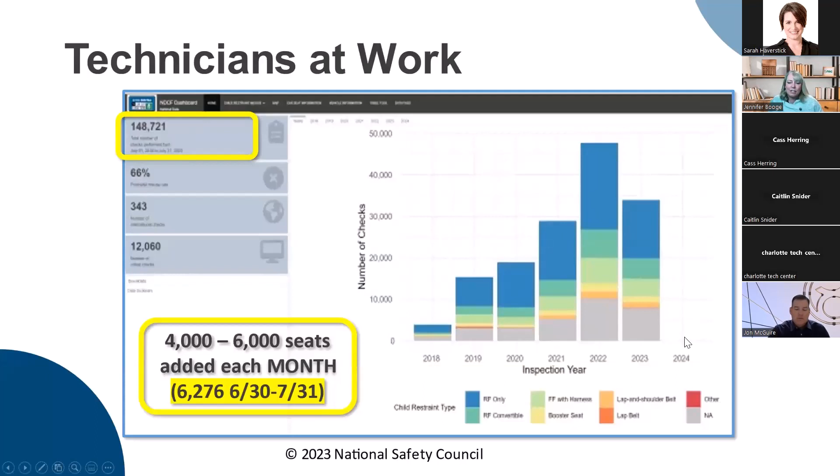We average somewhere between 4,000 and 6,000 seat checks per month. And of course, we're leading up to National Child Passenger Safety Week, Child Passenger Safety Month here in the US. I'm anxious to see what our numbers will look like in September, but just to give you some perspective, from June 30th to July 31st, we had 6,276 seat checks entered in. So that number continues to grow. That just means that technicians are doing amazing work out in the field and working one-on-one with caregivers.

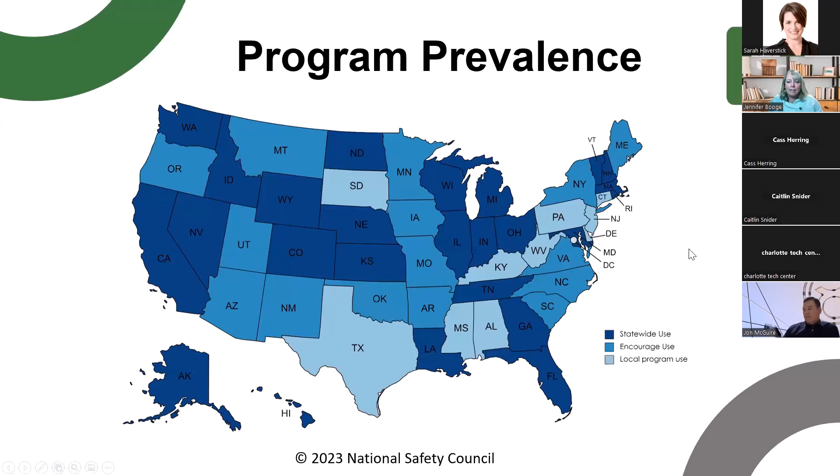And the light blue colors, we have a lot of local level programs that have adopted the use of the NDCF. The digital check form has been around for about 6 years now. It's been really growing organically, and so it's great to be able to see the work that technicians are doing and the data that's being fed into the NDCF. So I wanted to just go over some of our data analysis that we were able to do with those seat checks, the data collected up through June 30th, 2023. So we're utilizing those 142,000 seat checks.

What we're finding through the NDCF data is that about 60% of the checks are those rear-facing seats. What that means is that technicians are doing a really great job at reaching out to those expectant parents, to those caregivers with newborns. They're coming in for assistance with their car seats, but we are kind of missing the mark a little bit, as you'll see in the data, for those older children. We seem to see fewer older children coming through our inspections. Of those 60% of those rear-facing seats, 57% were infants or unborn children. We have an overall misuse rate in that category of about 62.6%.

So when we look at just a breakdown of the types of seats on arrival, again, you'll see about 60% of those are those rear-facing car seats. We see a significant decrease in the number of children coming to check events in forward-facing car seats, with only 12% of those children riding in forward-facing seats coming to car seat inspections. So what does that mean for us as providers, working with caregivers, as retailers reaching out to caregivers and providing them with the education? We need to encourage those caregivers to come back. They're coming initially, but what can we do to draw those caregivers to come back to receive additional assistance when they transition those children to forward-facing seats?

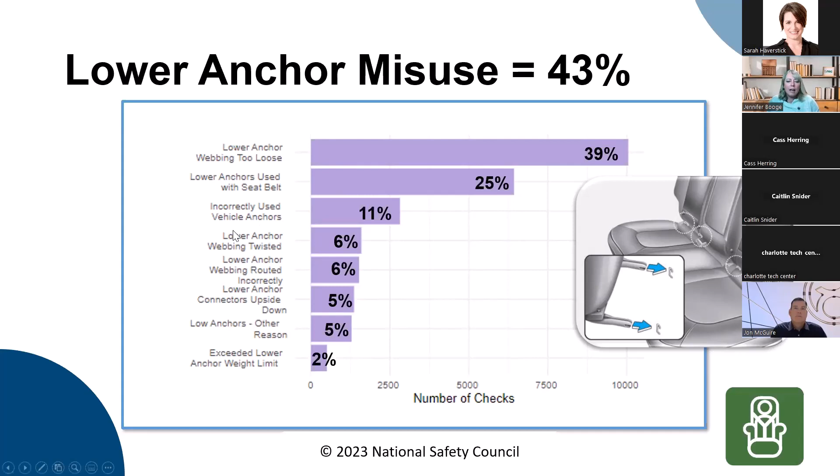If we did a comparison between our seatbelt installations and our lower anchor installations, you'll see here that caregivers are doing a much better job with our lower anchors. Our misuse rate is still at about 43%, but they're doing a significantly better job at installing them with the lower anchors than they are with the seatbelts. Again, at the top of the list is that it's too loose. So our message, as you can see, we're kind of seeing a pattern here, is to encourage caregivers and show them how to install those car seats to get them in nice and snug in their vehicles. And again, second on the list is using it in conjunction with the seat belts.

When we look at our tether misuse, it is at 54%. Now, what's alarming to me is the number of caregivers that aren't using a top tether. Our tether not used comes in at 68%. So of those car seats that have a top tether, so forward facing seats, 68% of those caregivers are not using the top tether. So we want to be thinking about what our message is going to be and what kind of outreach strategies and education we're going to use as we're working with consumers and caregivers out in the field. We want to encourage those caregivers to use that tether.

When we look at our harness misuse rate, and again, this is overall, the misuse rate is about 49%. And breaking down those top misuses, again, coming in at number one, is that the harness is too loose at 34%. Followed closely by harness slot in the wrong placement. So it's either too high or too low. And then the chest clip is either too high or too low. So again, we have a lot of work to do to educate caregivers on the proper use of those harnesses and making sure that they're in the right slot.

We're seeing an increase with a number of seats that have those no rethread harnesses where we can just simply raise and lower, but caregivers are oftentimes not understanding the functionality of those, that ability to be able to raise and lower that harness.

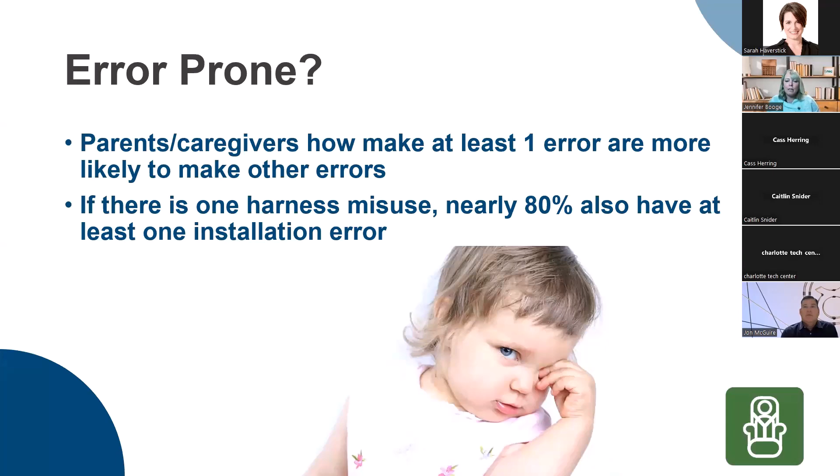So not only do we need to educate the caregiver on choosing the proper car seat, but on using it correctly, making sure that that child is secured correctly and that car seat is installed correctly in the vehicle.

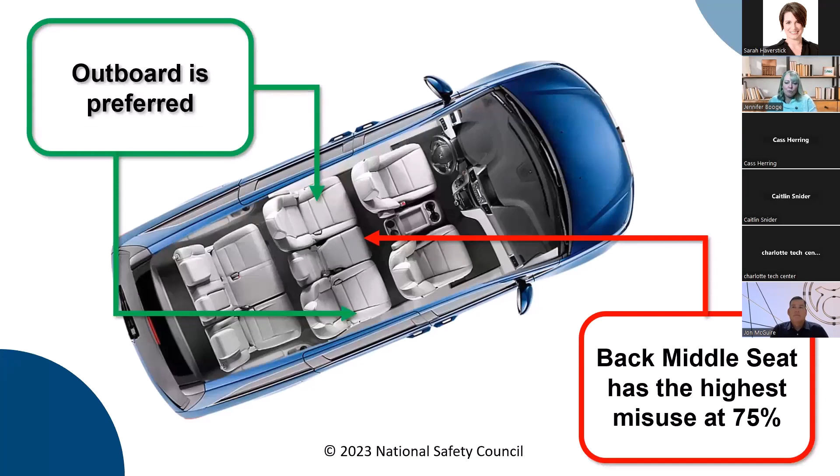So the next thing that we looked at was what was the preferred seating positions for children riding in car seats. And the preferred seating positions are those outboard seating positions. We have a 75% misuse rate in that middle back seat of a vehicle. And so caregivers are using outboards because of the lower anchors, but of those children that were riding in the center, we had a 75% misuse rate in that center seating position.

So that was just a quick summary of some of the data that we've collected through the NDCF.

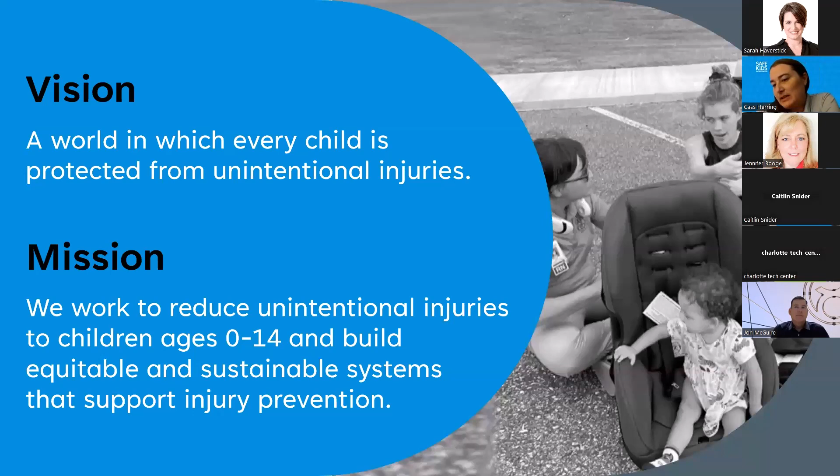So here's a great place that you can kind of go and look through the different resources that we have available. We even have them by age group. So if you're looking specifically at booster seats, we have a tab there for that. Or if you're looking for general safety tips, those are there as well. And there are downloadable versions if you'd like to share those with the parents and caregivers that you're working with.

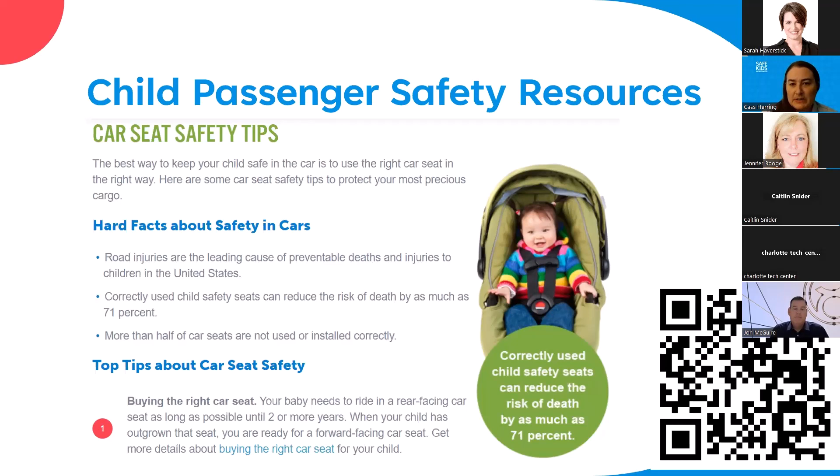And the next thing that I wanted to share with you is the Ultimate Car Seat Guide. This is available in English and Spanish, so you can change the page actually to Spanish. That has a few basic safety tips for parents and caregivers, and they can kind of select a general age range that would provide them a best practice recommendation for the car seat their child should be in and how to use it.

But looking at how we break that down into what that means to us, there are about 14 fatal injuries per week. And that's a big statistic. And some of those, as we'll see in our next slide, are unrestrained. So we can make a big difference just by making sure that kiddos are in a restraint or proper restraint for their needs.

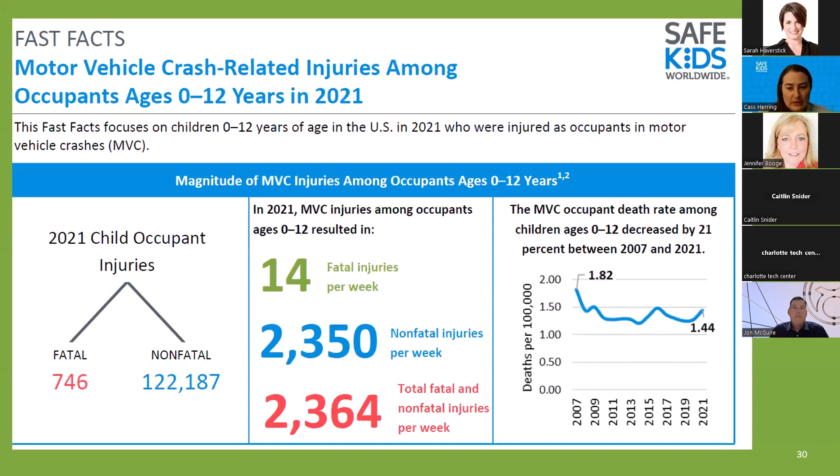So you see the fatal injury rate was slightly higher in that 4 to 7 age range, and looking at 0 to 3, kind of up towards the 3-year-old age range too. And that's something that Jennifer talked about in transitioning too early or not being in the proper seat. In the data that she showed, you can see that reflected in the injuries and what's actually happening in the field.

This data also breaks down the injury rate among different demographics and looking at the highest risk, we have a higher risk of fatal injuries for Native American and Alaskan natives in this age group. So it tells us that we need to make an effort in making sure that we're partnering with these communities and providing education that's relevant to what their understanding is and making it salient for the populations that we're serving.

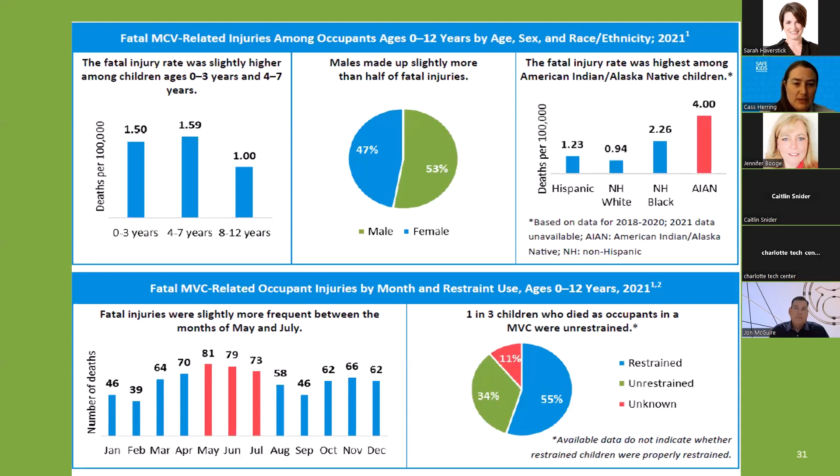And this is a great graphic, and you can actually download this fast fact from our website. You can access it from the same safety tips page that was previous. You can use that QR code. And Sarah, I'm happy for you to share these slides if you want to do that. But this kind of quantifies injury in a dollar amount, and it's kind of staggering. So utilizing CDC data and calculating this, you see that these injuries that are preventable can cost families and our society quite a bit.

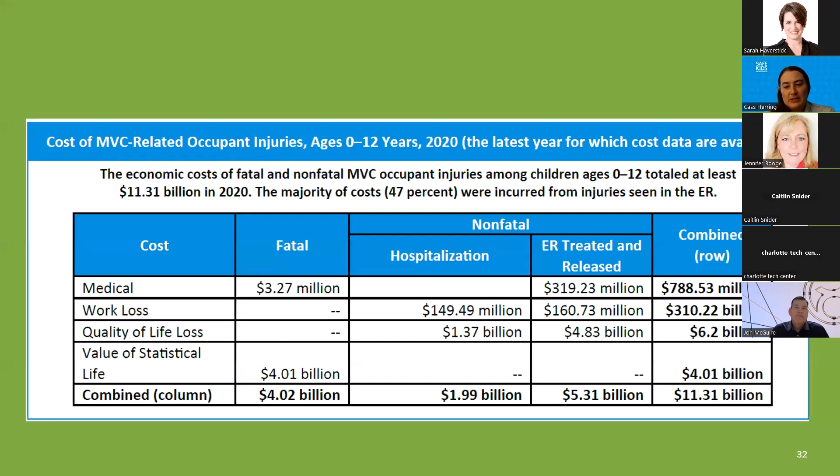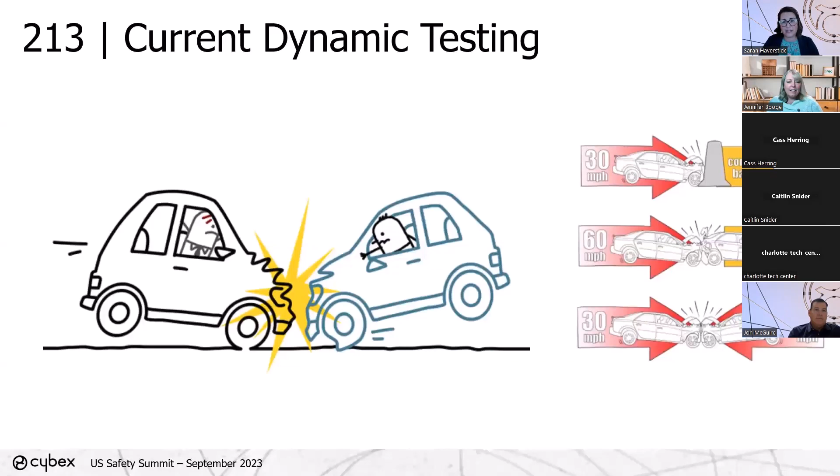Also equivalent to two vehicles traveling 30 miles per hour and impacting head on like you see in that image. This is what our current test bench looks like. When we talk about the test bench, it's that lighter bluish gray foam that you see underneath that car seat. So the bench is the structure that the car seat is sitting on when we run our sled test.

This is all regulated. So the whole design of this bench is included in that 213 standard. The cushion and the type of cushion and the thickness and kind of squishiness of that cushion is also all regulated as part of the standard. And then additionally, the way in which we attach the car seat to that bench is also regulated as part of the standard. So right now in our compliance testing, we use only a type 1 or lap only belt for most of our testing.

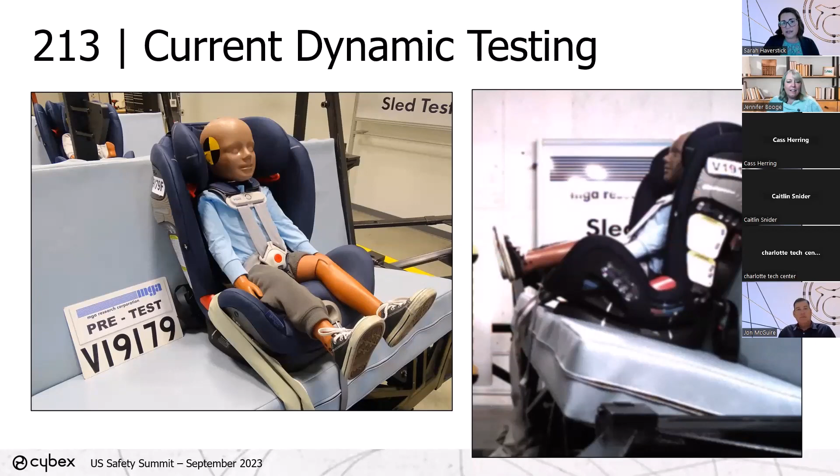The only time we use that type 2 lap and shoulder belt is when we are conducting a booster seat test. So I want you to think about that for just a minute. And in your head, think about the last time you were in a vehicle that had a lap only belt. And probably for most of the folks on the line, it's been a little bit since you even saw a vehicle that had a lap only belt. So the current standard as it's written right now, the design of this bench is based on the design of a much older vehicle that was representative of the vehicle fleet at the time that this regulation was written.

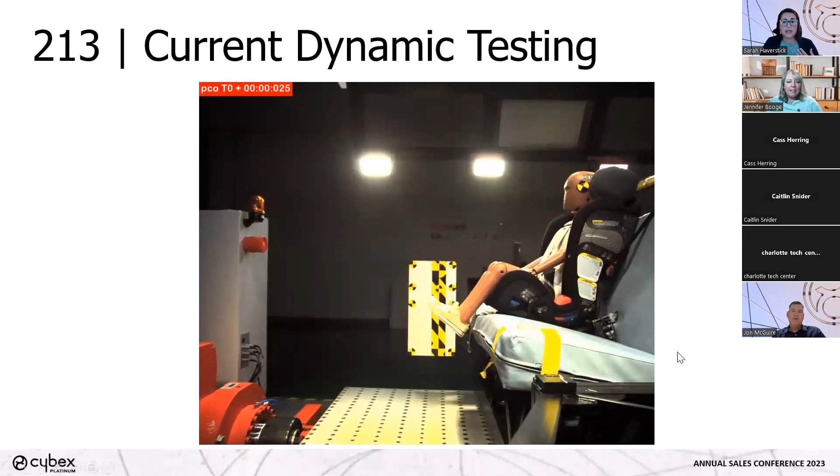You can also see how much movement. This was an untethered test. So this was just lap shoulder belt. It is untethered, so you see the most head excursion that we would expect to see in that crash. I'll run it one more time for you. So when we are doing this and when our engineering teams are reviewing this information post-crash, we're looking for things like the integrity of the car seat. We don't want to see it fracture or separate in a way that would cause harm to a child.

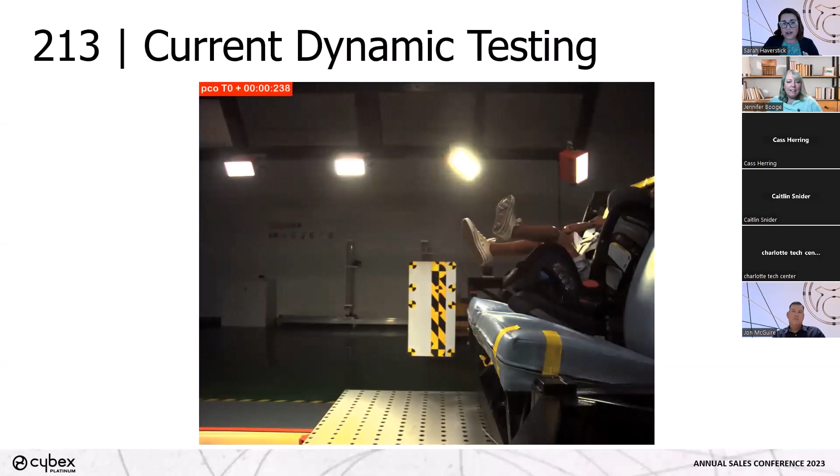And then these dummies, most of them are instrumented. So we're also reading injury-related values like the HIC or the head injury criterion, the chest acceleration, which is giving us information on how the forces impact the head and the chest of the child and how that might relate to a risk of injury.

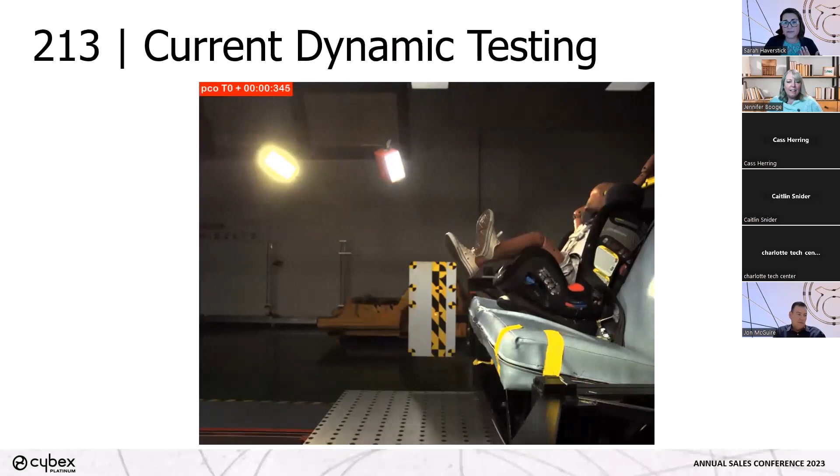And then we're also using, if you can see my cursor here, these targets and the targets that you see on the dummy itself, and we're looking at movement. So forward facing, we're measuring the head excursion and the knee excursion. In rear facing, we're measuring the angle of the seat back and how much it's rotating. And all of those metrics are in the 213 standard, so we understand where we need to fall within that compliance testing.

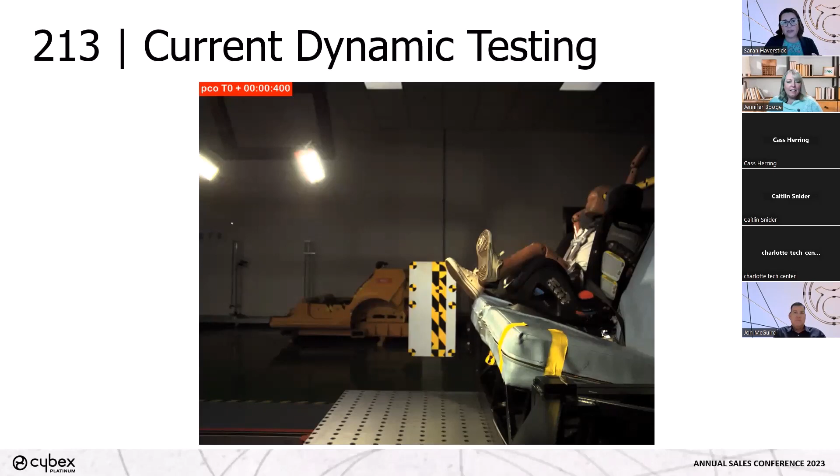But now we have 213A. So 213A is the new side impact standard. This was announced last summer, so we are in the midst of our implementation period right now.

And I think probably the most important thing to recognize is that side impact is not new. Side impact is something that we've been doing for many, many years. And we've been doing this because side impact crashes rank almost equal to frontal crashes as a source of injury for kids. So we know that we can't choose what kind of crash we might get into, and that in these side impact crashes, there's considerations for the kids that we are working with. So we've been doing this type of testing for many years.

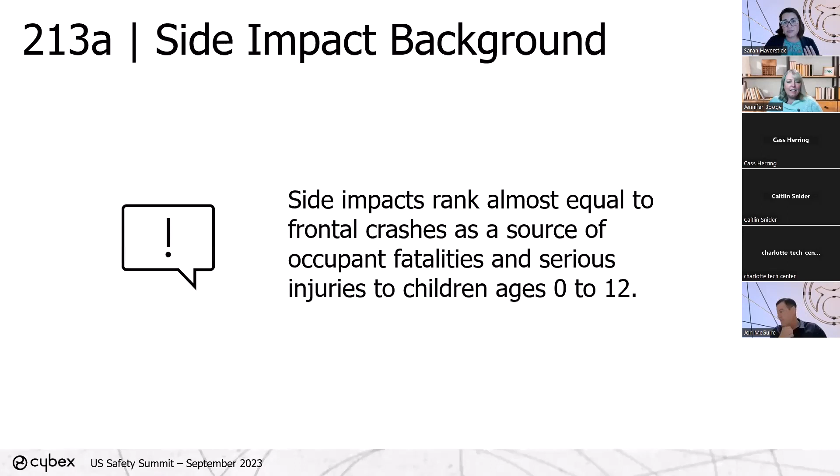NHTSA has been working through this as well to try to figure out how they can regulate a test that is repeatable and that is something that we can use across the board for all car seat manufacturers. So that's what they've created with 213A. 213A is measuring what we call a near side impact. So that means that your car seat in the vehicle is positioned next to the vehicle door that is impacted.

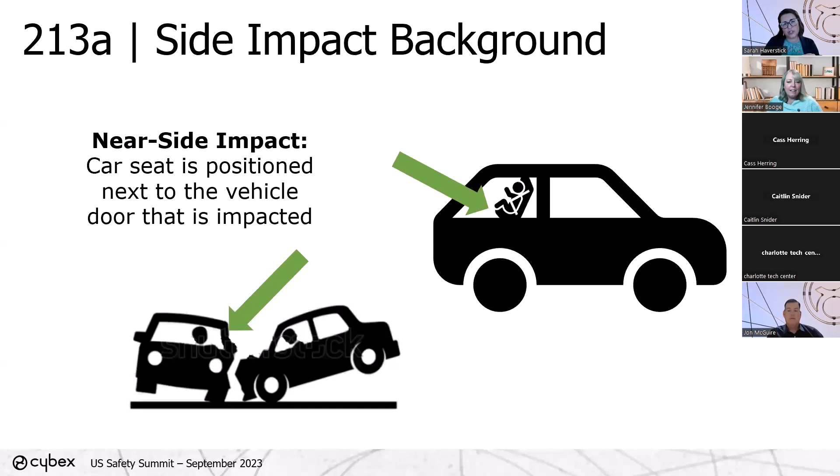So we gave you a few little illustrations here to help you understand. But the thing that helps me think about this is that the side impact crash is really like being T-boned at an intersection. And that's the crash that we're trying to measure here. You have a vehicle that is moving forward that has the right of way that's going through this imaginary intersection here. And then you have another vehicle that maybe should have yielded or stopped or is running a red light and ends up crashing into the side of the vehicle. So that car seat is positioned on the side that is closest to where that other vehicle is interacting.

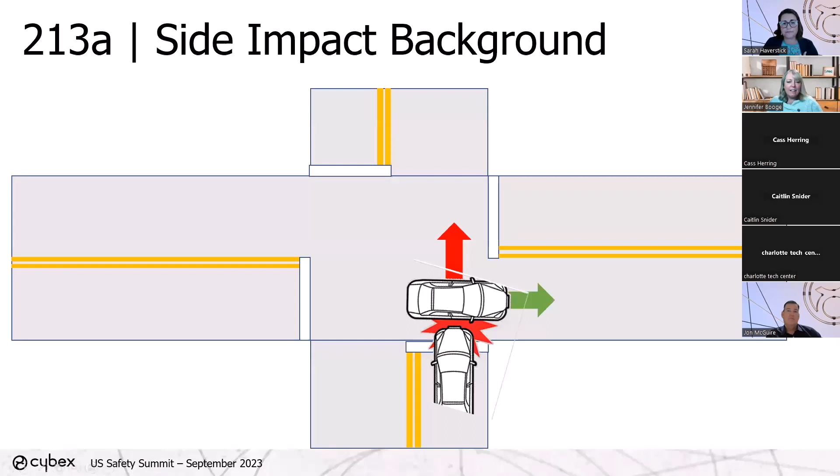Because remember, in a frontal crash, we have that whole frontal area, the crumple zone of the vehicle that's helping to absorb crash forces. In a side impact crash, there's not as much vehicle structure next to the occupant. So now we've got to worry about how that door is going to interact with that car seat or with that child in that car seat.

We also have dummies, obviously, that we're going to test with. So we're borrowing the CRABI dummy, which is our 1-year-old, 12-month-old dummy. This is used in frontal testing right now. It is not instrumented. So we're using this dummy to represent the younger children in the car seat. And we're just looking for what we call containment, that the dummy's head stays contained within the shell of that car seat during the crash.

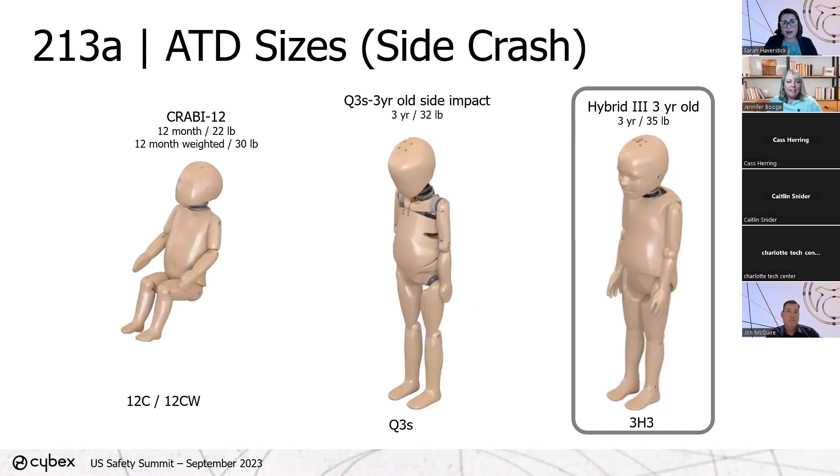The other thing that I want to call out with this is you'll notice we're testing with a 1-year-old and a 3-year-old, and that's it. So the 213A side impact standard only goes up to 40 pounds. And NHTSA says the reason that they capped this at 40 pounds is because typically the height of that heavier, older child positions their head high enough in the vehicle that they can take advantage of the other side impact protection available in the vehicle, like your side curtain airbags, as an example. So that's why this is maxing out at 40 pounds. And the biggest dummy we're using is this Q3S.

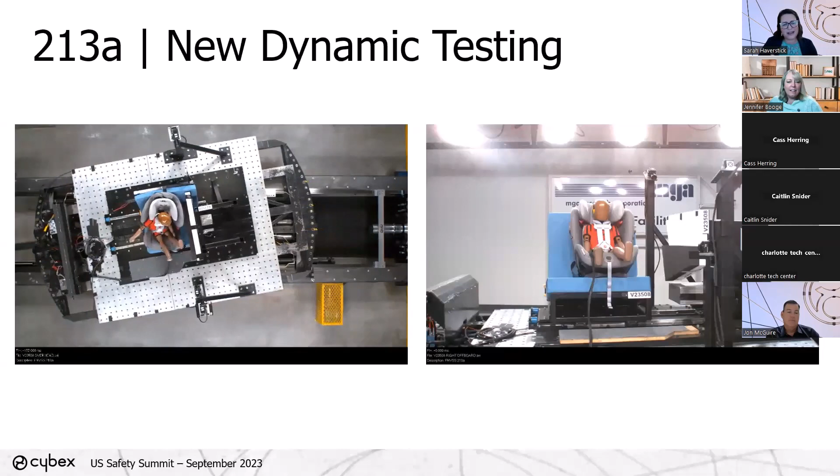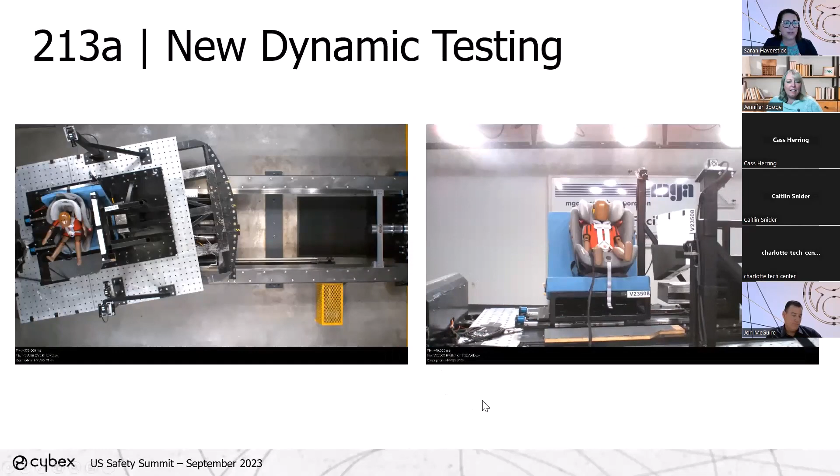But the idea here is we're mimicking that car seat going forward and a frontal component to that side impact crash. Because remember what would happen in that intersection, your vehicle was traveling forward when another vehicle came in at the side. So that's what that 10-degree offset is helping to show. Here's the same test from a different angle. Again, this time you can see a little bit more how that blocker, side door, is interacting with that car seat too.

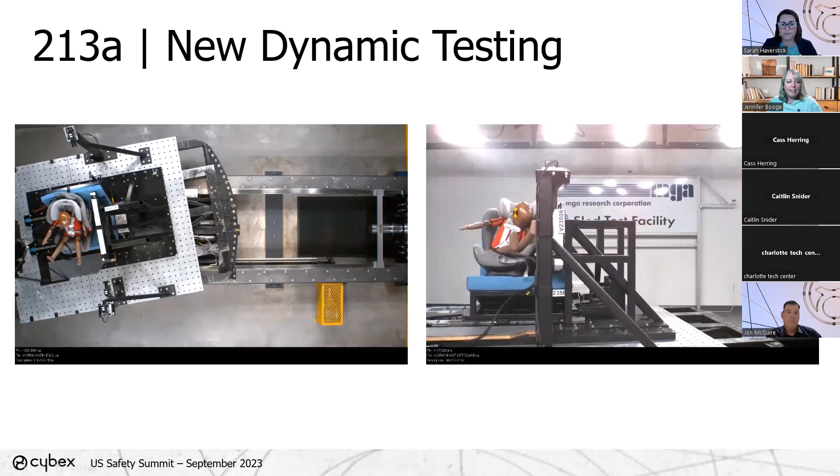So then just to wrap up, we have a little bit more that we expect to have happening with 213 in the very near future as well. And that is a new updated frontal test. So the big changes here are a really updated frontal standard, as well as some label, instruction, registration updates as well. So those are the two areas that are really getting the most change with this upgraded 213.

And what's important to know here is that our current 213 standard, again, I said more severe than 98% of the crashes in the real world. It has been proven successful. But as I mentioned from the beginning, we look to research to understand how can we improve the regulation? How do we better standardize and solve for safety with less variation in testing? And that's what they're looking for with this new upgraded 213.

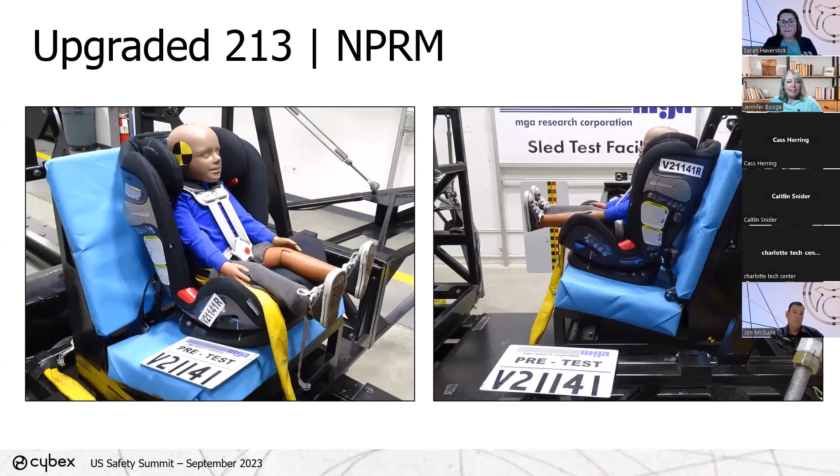So just as a timeline here for what is happening with this upgraded frontal, NHTSA put out that NPRM back in October of 2020. There was a public comment period that ended a couple months later. They actually extended that comment period to the spring of 2021. And we expected that we might have that final rule in August of 2023, but we haven't gotten that yet. So we're hoping that maybe in the fourth quarter of the year, we expect some updates on what the timing is for that.

We do know, however, that based on what was written in the NPRM, that following whenever we get the actual final rule, the implementation period is going to be a little bit phased. So we're going to start with some updates that'll be made around the product registration component, and that would be required to be compliant within about 180 days after that final rule. And then about a year after the final rule, there would be some labeling requirements that would at that point go into effect. And then we would have 3 years to do that full dynamic portion, because as you can imagine, when we change what we do in testing, there is a lot of testing that goes on in the background that we would need to be working through.

On the side impact side, I don't have it on here because we didn't want to make this arrow quite so long, but the NPRM for side impact was actually submitted in 2014. So that side impact has taken quite a bit of time, but we did get that final rule back in June of 2022, last summer. And our implementation date for 213A, the side impact, is June 30th of 2025.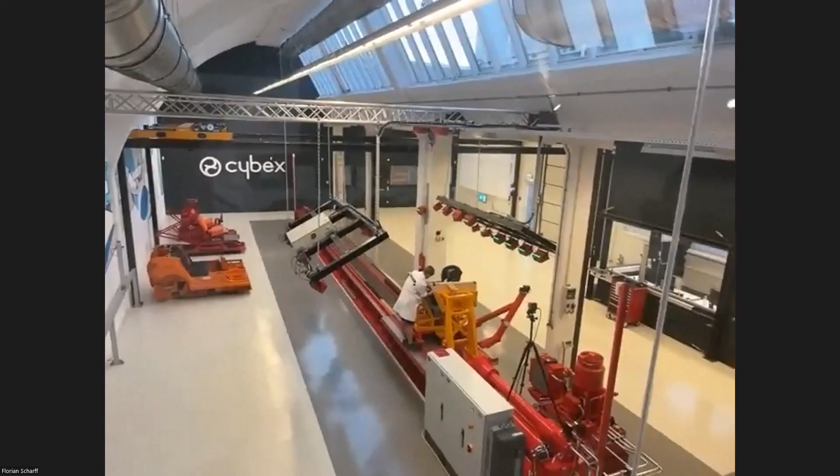So here we have a room with a good overview of our complete lab area. This room is also used, as mentioned, as a training area where we hold trainings for external people, even some authorities like the police departments. And here we have a good overview of our sled room. You can see here in the center our sled system. My colleague Michael is already preparing the test for you, checking all details, checking the dummy settings to follow the procedure we want to have.

You can see here on the left side, close to the wall, different benches. At the moment we have the well-known ADAC side impact bench on the sled. The ADAC is a consumer organization. But we have some more here, like the ADAC front impact bench. This is a car body, about a quarter of a car body, and some others, but now I will go down and show you these in detail.

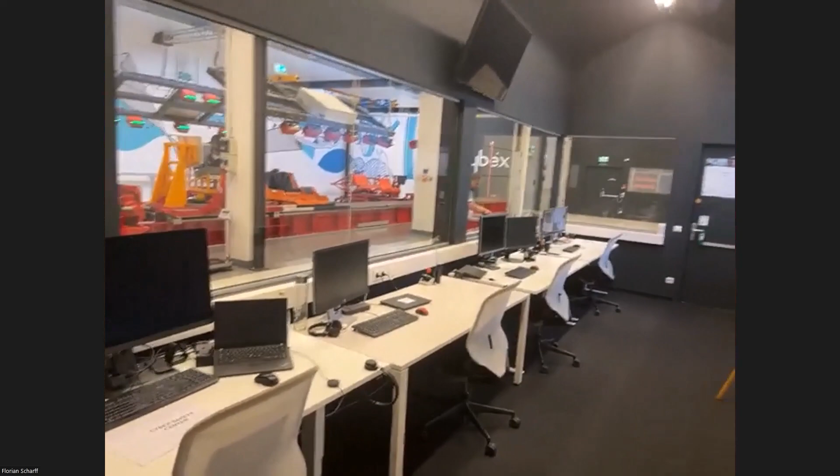So now we're entering the control room. Normally, this is the point where no external people are allowed, but today I'm happy to be allowed to show you all the details of our lab. As you can see, this is our control area where our technician Michael has his main working place. Here's our central control unit. We control the sled system and also the high-speed cameras. We have 6 high-speed cameras in total to be able to record the tests from every angle we want. We can even attach the cameras to the sled to get a good overview of what happens during the test.

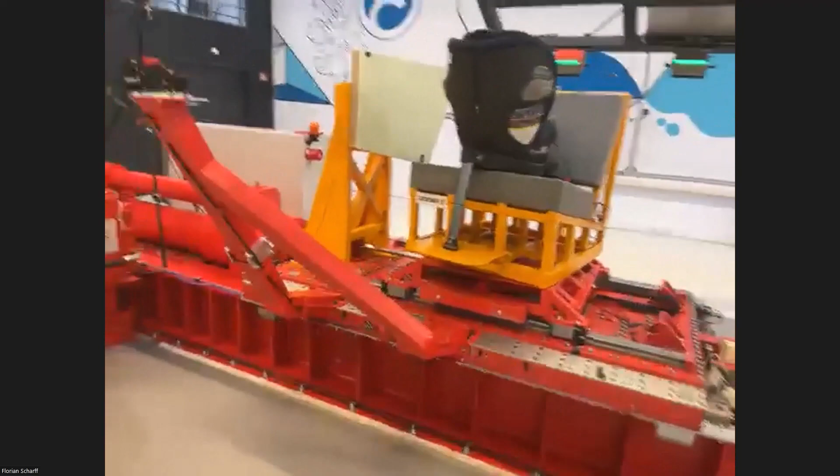Now we're getting a little bit closer to the sled itself. So it's quite a compact sled system. It's just about 18 meters in length. The system here is working a little bit different than you would imagine a real crash.

So when you think about a front impact, driving a car towards any obstacle, worst case, for example, a bridge pillar, your car will be stopped quite fast, but your body wants to move forward. If you're a driver, you've got this nice airbag in front of you in the steering wheel, which catches you, but the movement is towards the steering wheel.

The same happens if you have quite a powerful car, put the rear gear in and accelerate to the back. So the car wants to move, your body wants to stand still, therefore you've got the relative movement again to the steering wheel. So you've got the same kinematics of your body, and in our case, we get the same results, same values from the dummy.

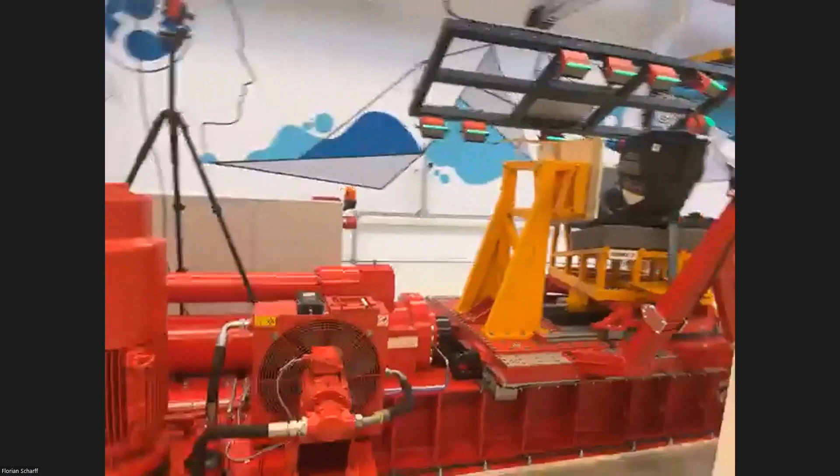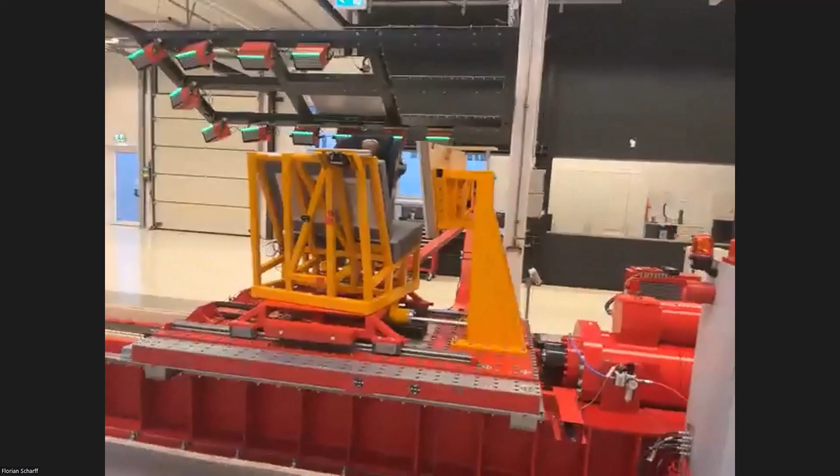From the other side, you can see quite well the door panel and the bench. In this case, similar to the new FMVSS standard, it's also turned by 10 degrees to simulate, as explained already, the forward movement of the hit car.

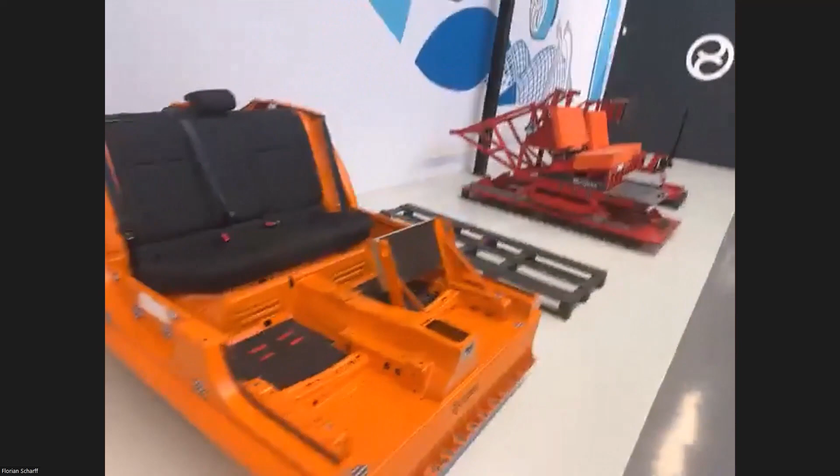So here's some detailed view of our different benches. This was a complete car. So we cut away everything which is not needed, which allows a good view of the scenario we want to see, the movement of the dummy, and also the child seat itself. The important things we kept, so the rear bench and also ISOFIX connectors, for example, and the retractor belts are still in. We've got two different benches.

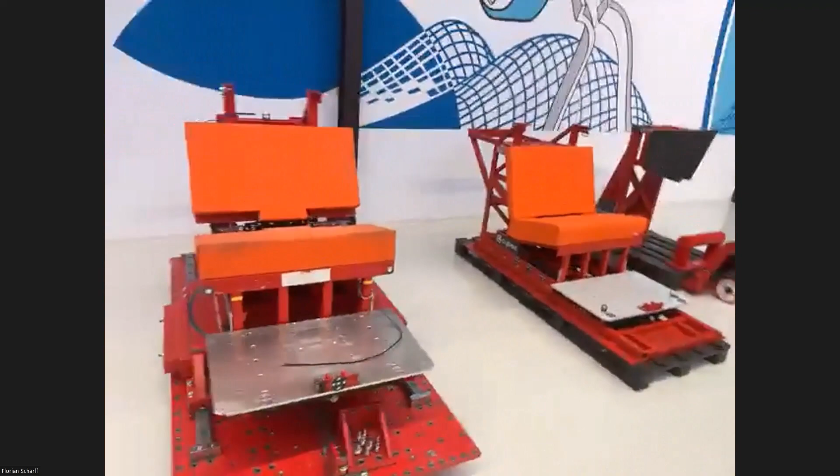Mainly, of course, we're in Europe here in Germany, so this is more related to the European standard, to R129 in this case. This is quite a nice bench because it can be turned in every direction, so we can simulate a front impact, side impact, and also rear impact. This one is the old R44 bench, which is no longer in use because the R44 regulation is no longer in force, so it's just for internal research tests.

So for the next room, I have to excuse myself. I have to pass one room where we have some prototypes, so I have to cover the camera for a short moment. Just a second.

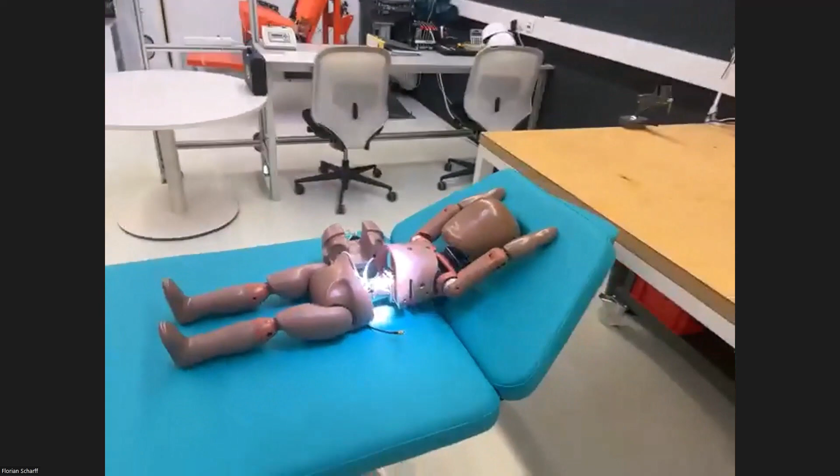So now we have a special room here. It's our emergency room where we take care of our dummies. Here, for example, the Q1 dummy just needs a standard check, some maintenance that we're doing here.

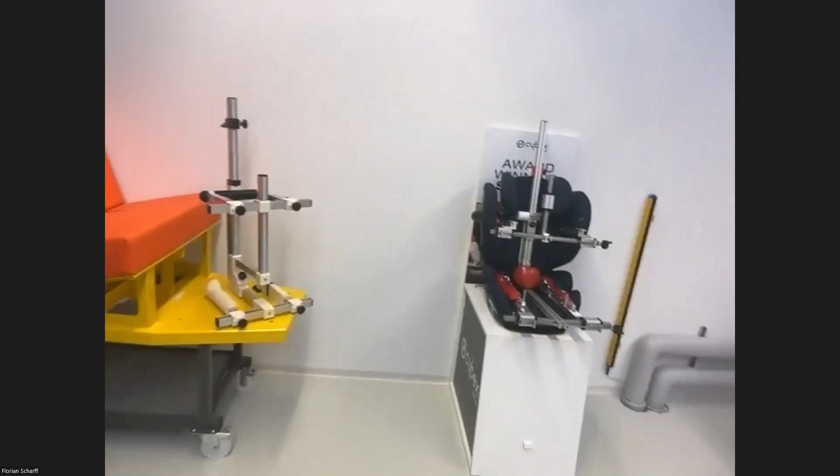So here's a part of our dummy family, starting from the Q0 on the left side, the smallest available dummy from the Q series, up to the Q10 on the right side. Just a side fact, it's quite an expensive family. The tallest one is worth about 250,000 euros, so quite expensive dolls we are playing with here. Additionally, we have some measurement devices where we measure internal dimensions, but I will come to this topic later again.

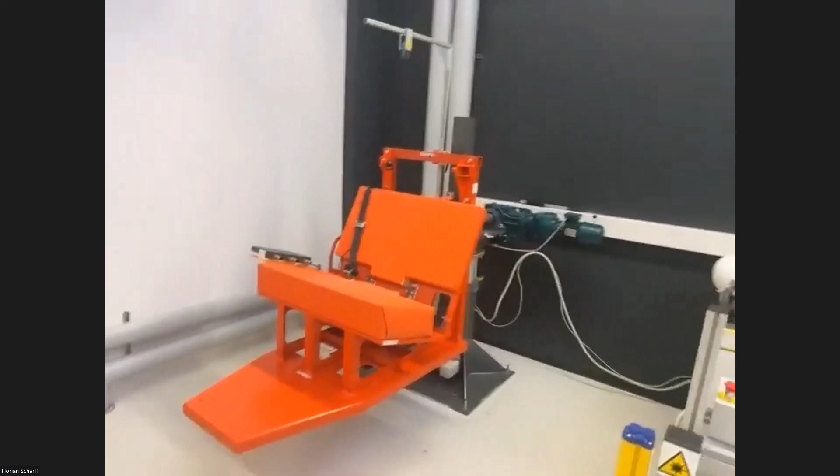And last but not least, the overturning rig, where we can simulate overturning of a car in every direction, to the front, to both sides, and even to the rear. So it's also an important factor when it comes to analyzing real crashes.

So sorry, I have to cover again. I'm going back to the sled room.

So now I'm back. I have to leave this main sled room now because Michael is preparing the test. When we are running tests here, nobody's allowed to be in this room because something can always separate from the sled, even from the bench. So it's a little bit dangerous. Nobody is allowed to be here and all the doors need to be locked when you run a test.

Therefore, I'm in the control room and Michael is preparing the test. This will take just a few minutes, and during this time I can show some information about our development strategy and our worldwide network.

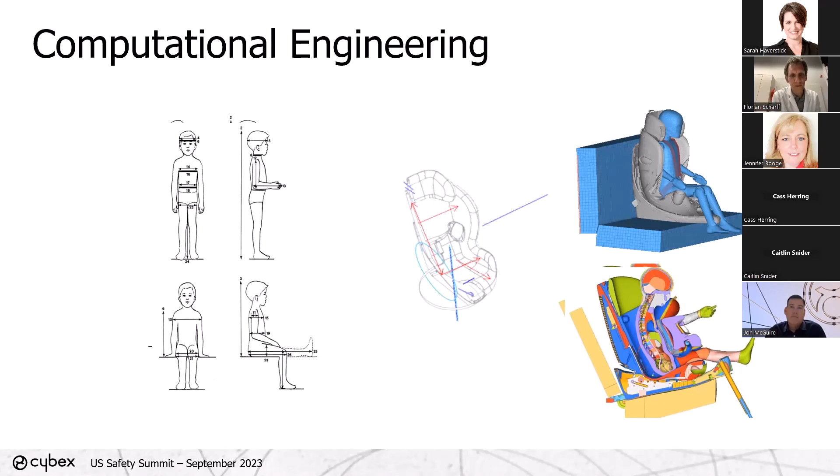As already mentioned, we are not just relying on official certifications and regulation tests. We're always looking at what can happen in the real world. And there we have been doing a lot of tests for a long time which are far above the official regulations. For example, to get an R129 European standard certification for a child seat, you need to run frontal impact tests at 50 kph, about 30 miles per hour. But internally, we are already testing at up to 50 miles per hour.

So much faster. And also, as you can see here in the center, side impacts have been part of our development for a long time. Officially, the R129 regulation has been in force here in Europe since 2013. So we have also been running these side impact tests internally for the US seats for quite a long time, so we have a lot of knowledge about this, and also some component tests.

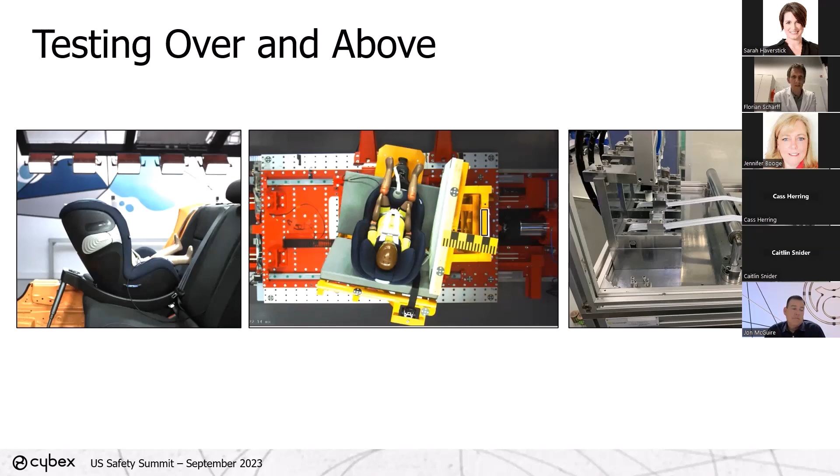So again we are not just relying on official tests required by the regulations, R129 in Europe or FMVSS. We always think about what can happen in real life, what is important, what kind of temperature, for example, we can see in real cars. So we are also testing our materials at these temperatures, moisture, and so on, far above the regulation. We have some special seats where the regulation is really limited in telling us what to do and how to do it, so we have to think on our own about what can happen in real life.

So here's a good example. It's our Anoris T, a well-known, famous seat here in Europe because it was the best safety awarded last year. This is a seat with an airbag in an impact shield, and here of course special requirements need to be considered. On the left side you can see overturning. At the center, if you have an airbag in front of the kid, what happens if the kid falls asleep with the head directly on top of the airbag and the airbag ignites? We're checking the reality, basically.

On the right side you can see another scenario. We are thinking about what happens if somebody is climbing around inside the car, some misuse or whatever, and the airbag ignites while a second person is close to it. Is there any risk here? So for this project we did over 1,000 development tests to cover all these real-life situations.

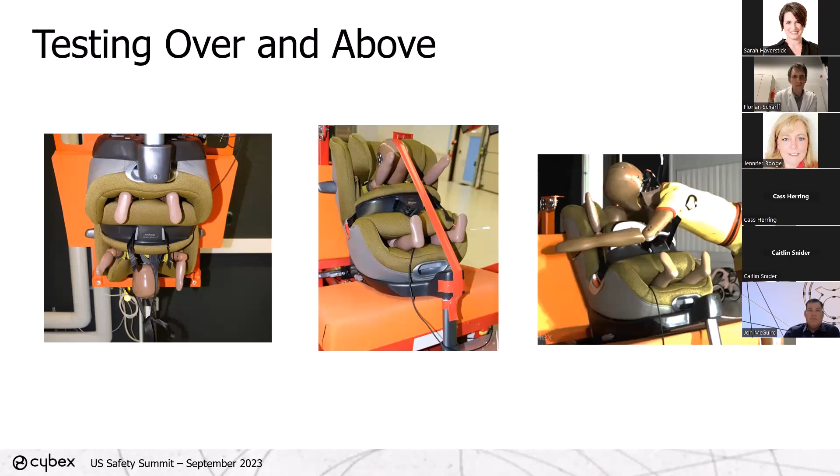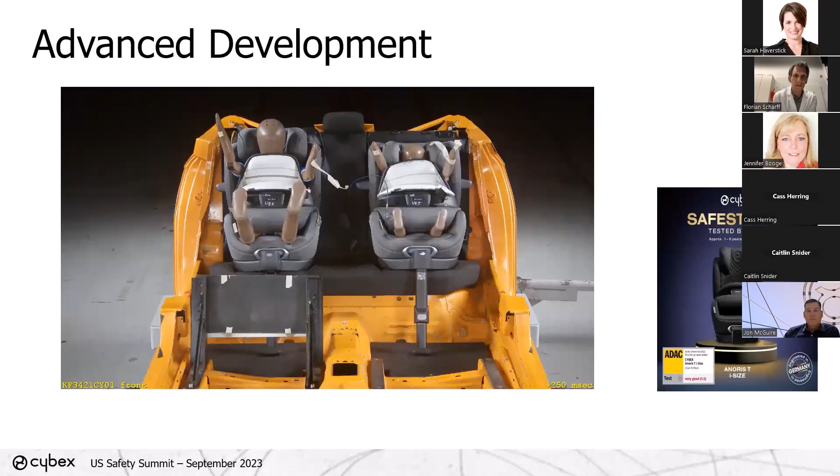Okay, here you can see a video from an external lab of the seat I mentioned, with the airbag in front of the dummy. You can see quite well that, similar to a car airbag in the steering wheel, it catches the head. But the secret of this airbag system is that we catch the dummy from the knees up to the head. The airbag is wrapped around the impact shield, so we have almost no movement, no kinematics, in the dummy area. So the kids are completely protected from 1.5 years up to 6 years, the age range for the seat.

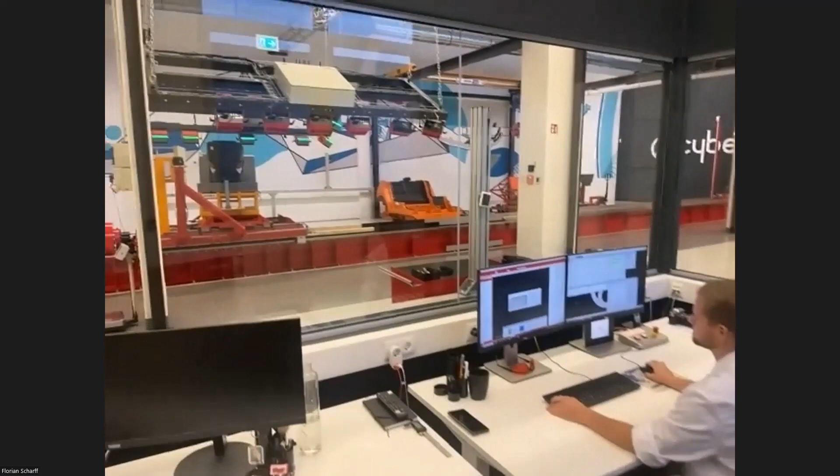So now we can switch to our real crash. So Michael will start the sequence now. From now on, it takes about 2 minutes. So I can show you some details. This is the view from our control unit here, from our PC.

We have 2 screens here. On the left side, you see the software for the cameras. So as mentioned, we have 5 high-speed cameras, and you can see them. One is attached to the sled, and one is here on the left side on this tripod in front of the sled. They can record up to 4,000 pictures per second, to show every millisecond what happens during this time, to be able to analyze it really in detail.

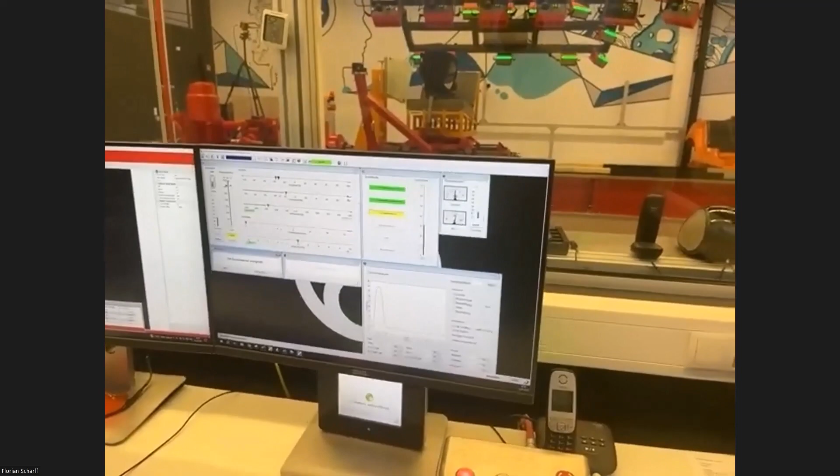You can show your view to our dashboard here. So it's our control unit. I can point a little bit to it. So here we have a countdown going down. So from 70 seconds, we have 20 seconds left. You will hear a warning noise right before we start the test. And then it's very important not to blink with your eyes because it's so fast. So if you blink in the wrong moment, you will not see anything. But I will tell you a second before we start the test again.

So now we are ready. Michael is pushing the button, so you can see our light units. That's good. And now we start the test. So that's it. So it was a simulation of a crash with about 30 miles per hour side impact. So a car is hit by another car with about 30 miles per hour.

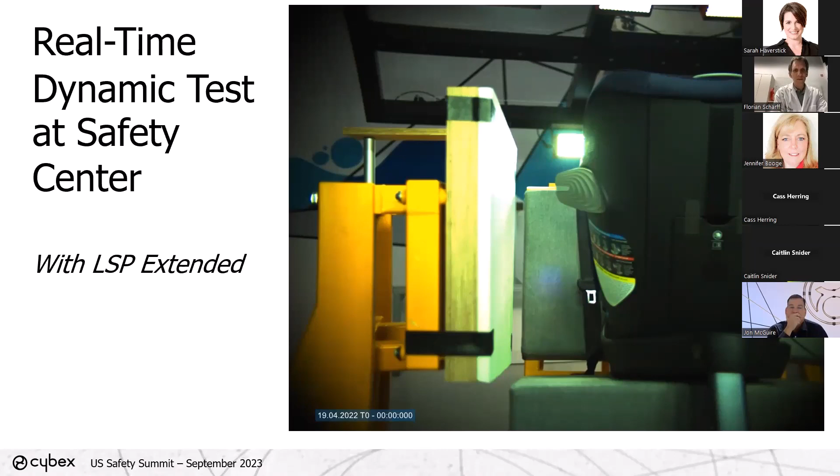As you might have recognized, you cannot see anything. So therefore, we are using our high-speed cameras. So we can show now 2 videos. They are pre-recorded because it will take some time to get them down from our cameras. Files are quite large, about 1 gigabyte per video. So it will take some time. So I can show you some videos which we recorded in advance.

So the first one shows a seat with our well-known famous LSP system. This is a small gray flap on the side. And if you take a detailed look to the seat, the upper part, we still can see a gap between the seat and the door panel. So now you can still see a gap. And the seat is a little bit turning to the side, so away from the door, from the area where the car is hit by another car.

So in this way, we can protect the kids quite good, to bring them a little bit away from the dangerous zone, and also allow some space for the head to decelerate over a longer time. So the values are much lower, so we can reduce the loads on the kids by an average of about 25%.

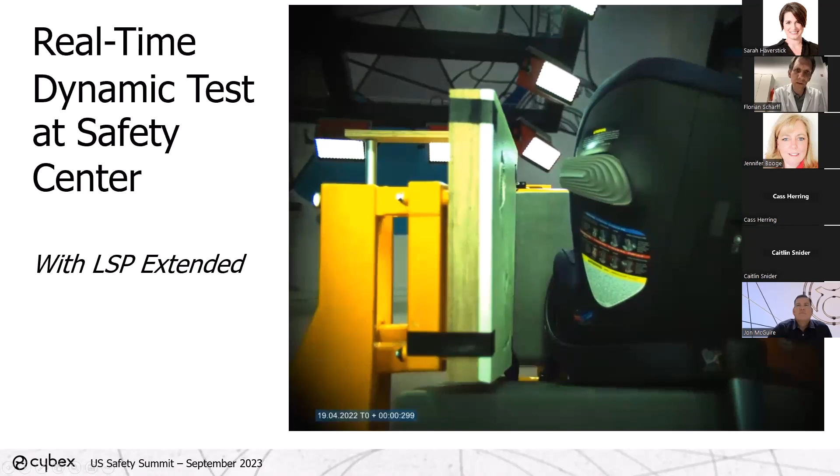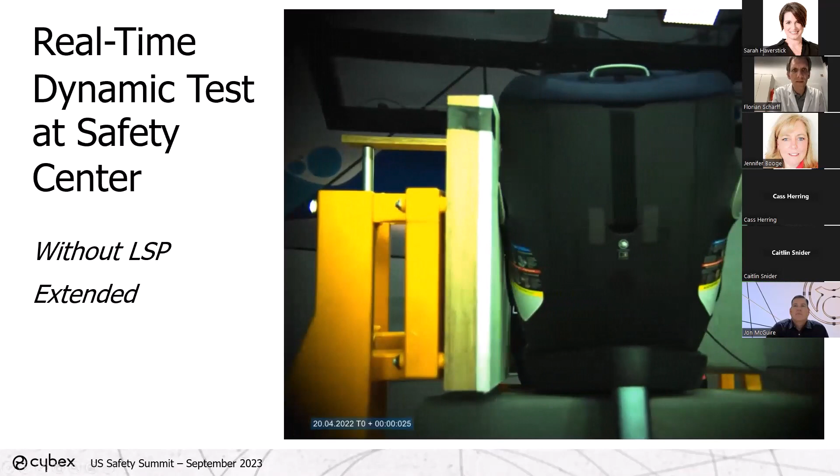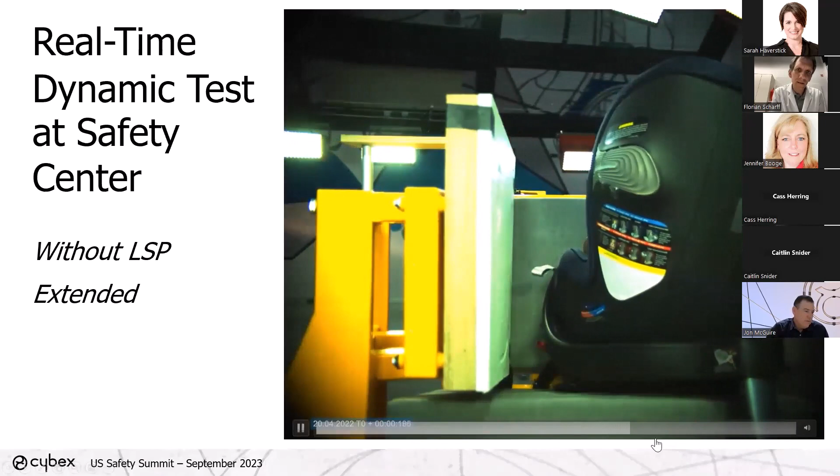So when we switch to the next video, we have a video without this LSP system. And again, if you see the upper part of the seat, it hits directly the door panel. The loads are going directly to the kid without deforming any element like we have seen before with the LSP. So there's no part which is taking the load, and we got the full load on the dummy on a short distance. So it's directly going to the head, to the neck, to the chest of the dummy, in real life, to the kid.

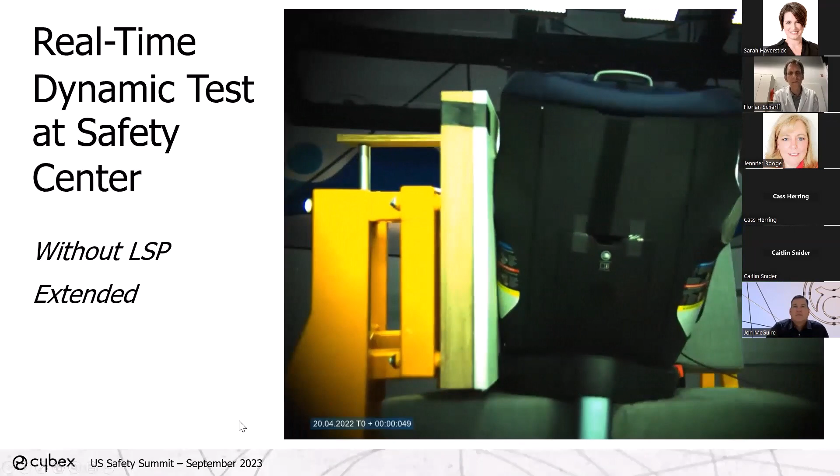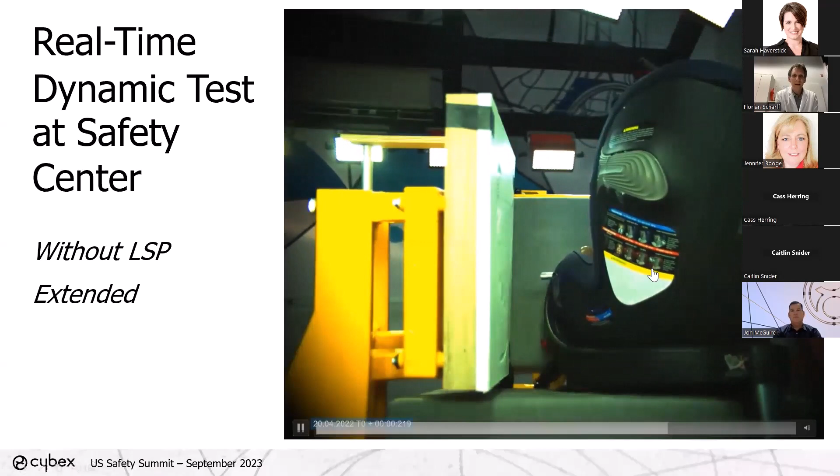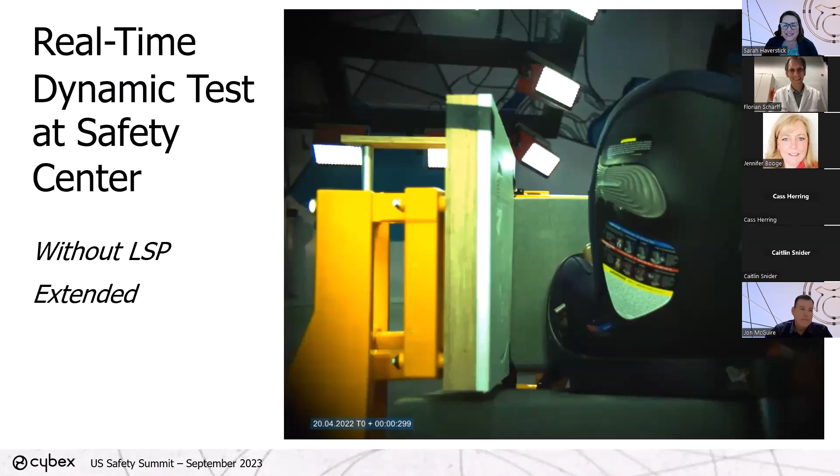Thank you, Florian. That was amazing. I have not seen the dummy room before, so that I think was a highlight for everybody too. So thank you for that. There are definitely some questions, and I promise after our next presentation, we're going to cover off on some of those questions too before we close out today. But first, I want to introduce Jon McGuire again from our product team in Charlotte, North Carolina, and he's going to chat about some of the new things we have going on.

Awesome. Thanks, Sarah. Florian, that was super impressive. Hard to follow a live crash test, so I'll see what I can do here, but really appreciate the tour, and I think that was very exciting overall.

I wanted to take a little bit of time to talk about CYBEX innovation over the years and in respect to advanced car seat development from a safety standpoint. Many of you may know that CYBEX has always been recognized as a leader in car seat innovations globally around the world. And when we are kicking off new car seat projects, we always base our design and development on what we call the SDF principle. And basically what that means is, number one, we're going to focus on safety, then follow that by design, and then thirdly, followed by function.

And CYBEX is committed to advanced car seat safety development. To that end, we employ hundreds of engineers around the world, whether they're sitting with Florian in our headquarters in Bayreuth, Germany. They could be at our Vienna Design Center. They could be with us here at the Charlotte facility or our factory in China. But all of the engineers are working collaboratively around the world on the advanced car seat development for all CYBEX products. We utilize advanced engineering and development.

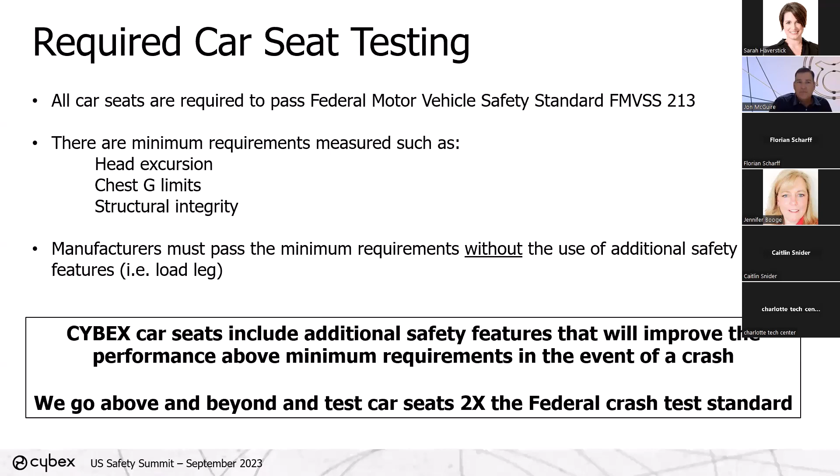So again, going above and beyond and make sure we're never going to have any defect or structural integrity issues with our products. If you can go to the next slide. Oops. So to highlight some of those additional safety features and installation features, again, how are we driving our car seats to be the safest in the market, as well as reducing that misuse from an installation standpoint?

The first one's going to be the LSP. Florian did a great job highlighting that with the crash test. Again, LSP, which is linear side impact protection, reduces the forces on the child in the event of a crash by 30%. And until this new side impact standard comes into play, we've been incorporating side impact features in our products for the last 8 years. And we've been testing those to the European standard because it wasn't a US standard. So that's a great example of how we're ahead of the technology at CYBEX.

The next one being anti-rebound bar. So the anti-rebound bar, which is incorporated into the base, can reduce the forces on the child up to 30% in the event of a front impact crash. The next one being a load leg. Load leg absorbs energy in the event of a crash by up to 30%.

And then the last one being SensorSafe. If you're not familiar with SensorSafe, that's our smart technology. It's a Bluetooth enabled chest clip that communicates via a phone application, and it will alert you if your child happens to undo the chest clip. It'll tell you if the temperature is too hot or too cold in the vehicle. And then lastly, it'll alert you if a child is unintentionally left in the vehicle. Again, back to the 33 children that died due to vehicle heat stroke. This is what we're doing to try to minimize that number.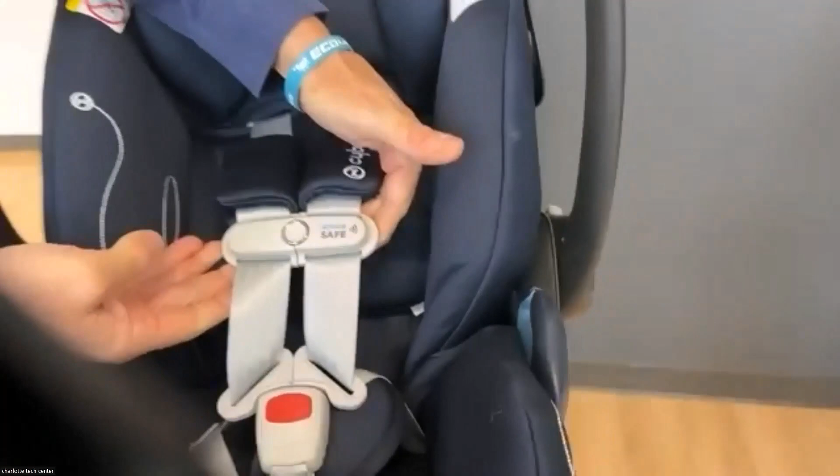You'll also notice the SensorSafe chest clip that will send you alerts to the well-being of your child. All of our fabrics are FR chemical free. So you'll see that across the board with all of our CYBEX car seats.

And then if I move to the base, move the shell here. The first thing that stands out is the load leg. And we talked about the advantage of the load leg, reducing forces by 30%. It's a 3-position load leg. So multiple adjustment points for outboard or even center positions in a vehicle.

The next thing to highlight is the rigid latch. So rigid latch, again, you simply deploy the latch connector on both sides of the base, align this with the hooks in the vehicle, push it into place. You get a nice, snug, tight installation in less than 5 seconds, and anybody can do it. So it's a great install. The anti-rebound bar, which is incorporated into the base, again, reduces forces in the event of a frontal crash.

If you're not using the rigid latch, which is what we would recommend from an installation standpoint, we do have what's called a SafeLock belt tensioner. You simply open up this door, route the belt through, take slack out, and then push this tension arm down. It'll take out the rest of the remaining slack and provide a really solid installation. So that is the Cloud G Lux.

Next, I'll move over to the Aton G Swivel. So this is the only swivel infant car seat in the market today. It's in the loading position, as you can see now. But to rotate the seat, you simply pull this gray lever, and you can rotate it 180 degrees in either direction.